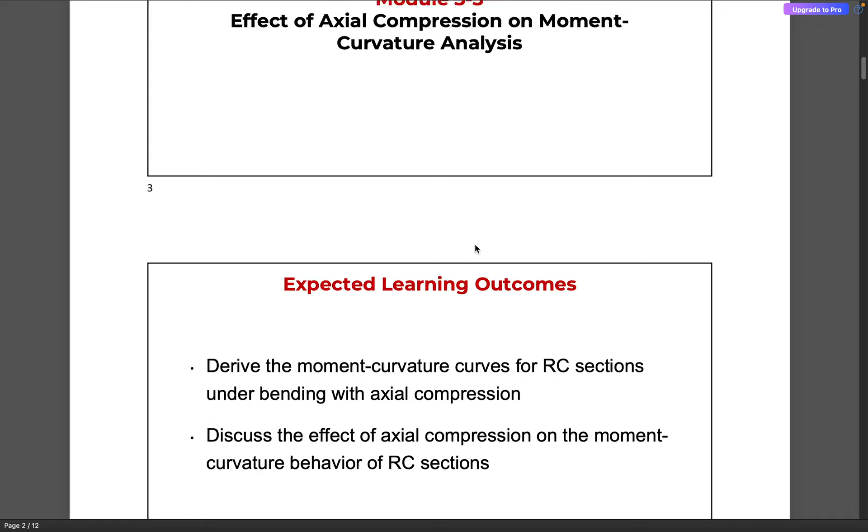As we discussed in the previous week, this moment curvature analysis is nothing but the development of the relation between the moment of resistance developed by the beam and the curvature it undergoes. So these are broadly the expected learning outcomes: to develop the moment curvature curves for reinforced concrete sections under bending along with axial compression. So there can be effect of axial compression acting on beams. We are going to delve into that topic this week, and discuss the effect of axial compression on the moment curvature behavior.

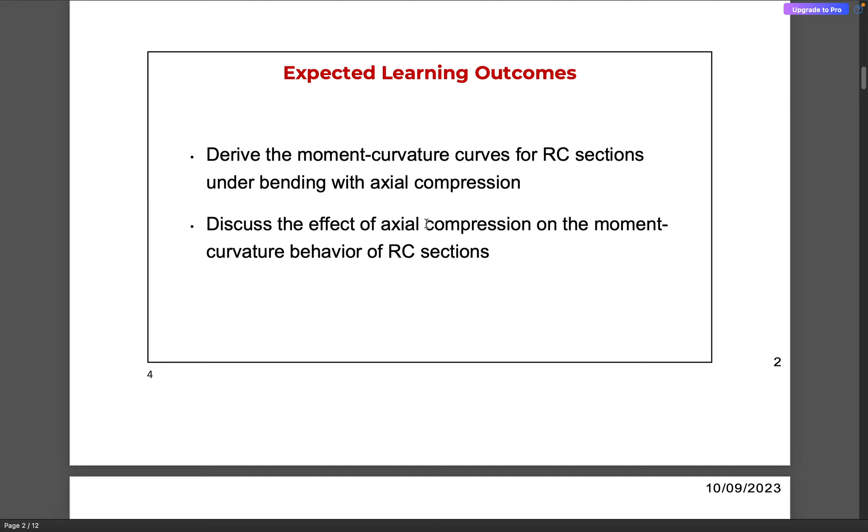So whenever there is an axial compression loading acting on the beam, what would be its influence on the moment of resistance, and what would be its effect on the curvature? So we're going to discuss about those issues in the form of numericals.

So essentially we are going to define this axial compression, that is P, through this relation, that is x into f prime c into Ag. Ag corresponds to the gross cross-sectional area of the beam, and f prime c is the compressive strength of the concrete cylinder. And when it is less than 0.2, we consider it as a beam action. However, when this x value, this load factor, is greater than 0.2, we consider it as a beam column action. So we're going to be discussing about both these actions in today's numerical examples.

So in the previous class we had referred to this simply supported beam. What happens when there is a representative uniformly distributed load, let's say W per unit length, and there is a representative point load W? What happens to the bending moment diagram? And then we analyzed what would be the compressive force and tensile force developed, and based on the couple these two forces form, and depending on the length of the lever arm between these two forces, we determine the moment of resistance.

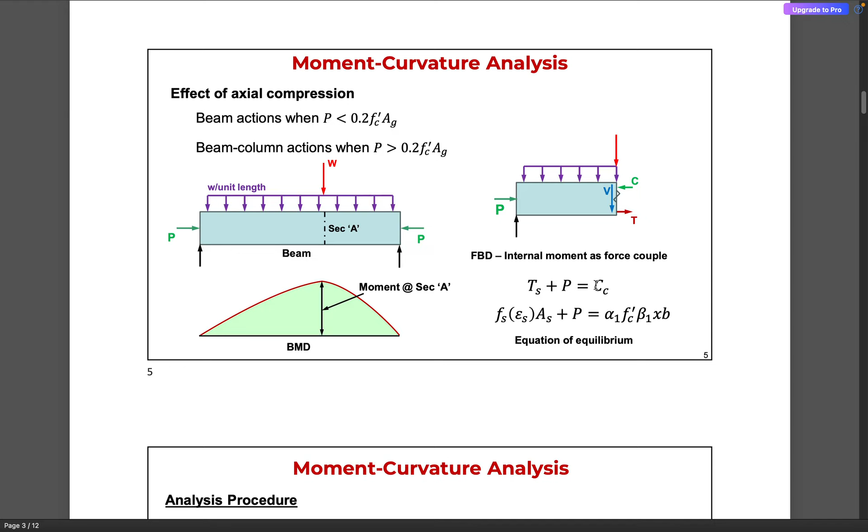So in order to develop the relation between moment and curvature, the analysis procedure is somewhat similar to what we did in the previous week. We need to choose a particular strain value within concrete in the extreme compression fiber, that is epsilon c. Then we need to assume a value of x, which represents the depth of neutral axis.

Then we need to calculate the value of compressive force and tensile force developed on the beam's cross section, and evaluate in terms of force equilibrium. We need to satisfy this condition: compressive force in the concrete should be equal to tensile force within the reinforcing bar plus the axial compression. If it is met, then we proceed to determine the value of m and phi. Otherwise, we increase or decrease the depth of neutral axis. This is essentially an iterative process.

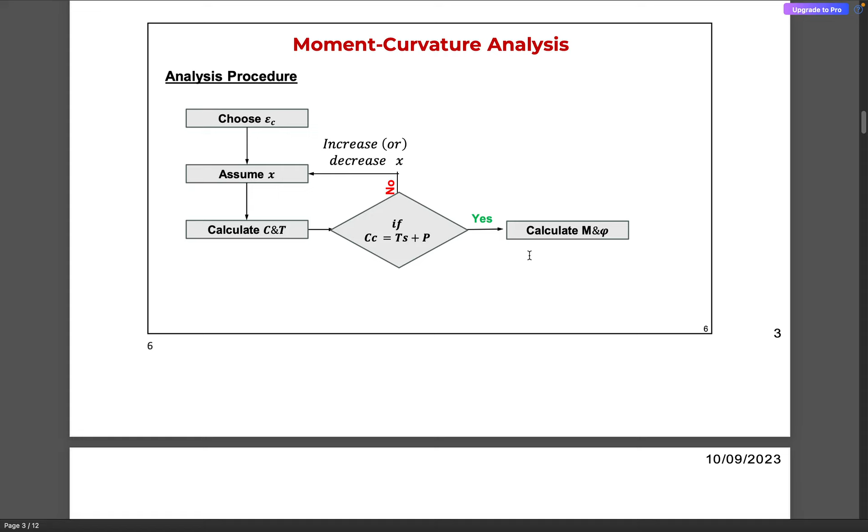In the previous class, we saw how we can use an Excel sheet to balance these forces and ultimately determine the value of m and phi. We are going to delve into this procedure in the form of numericals very shortly, and then we solved some example problems corresponding to 0.1 f prime c into ag, which can be defined as 10% of the actual compressive force, considering the compressive capacity of only the strength of concrete.

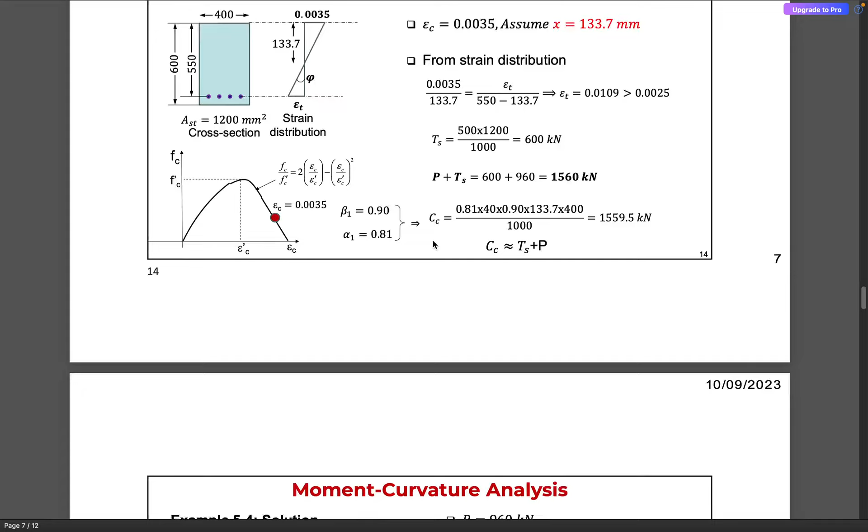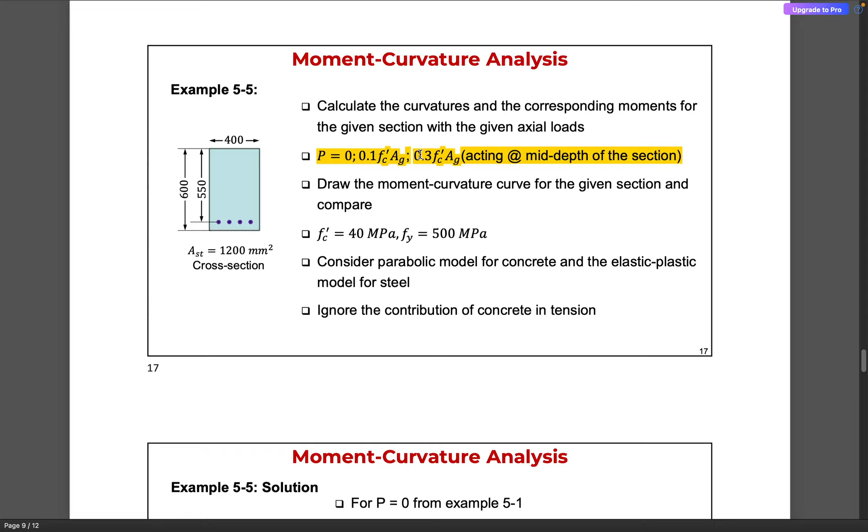So then we proceeded to determine the moment and curvature values corresponding to different values of strain. I'm going to skip this because we'll deal with it in detail in our numericals today. After finding the moment curvature relation corresponding to 10% of the actual capacity, we proceeded to determine the moment curvature relation for 30% of the actual capacity of the beam. Then we essentially compared the influence of axial compression on the moment curvature behavior. We're going to discuss more about them in the form of numericals.

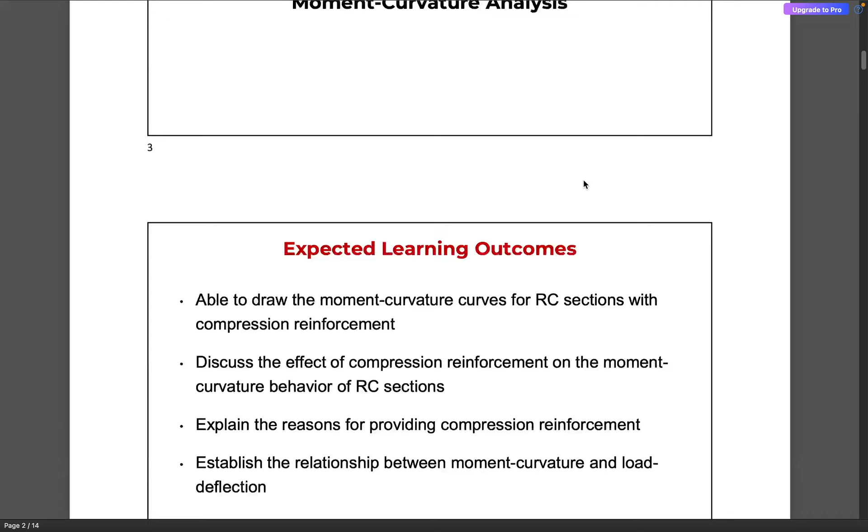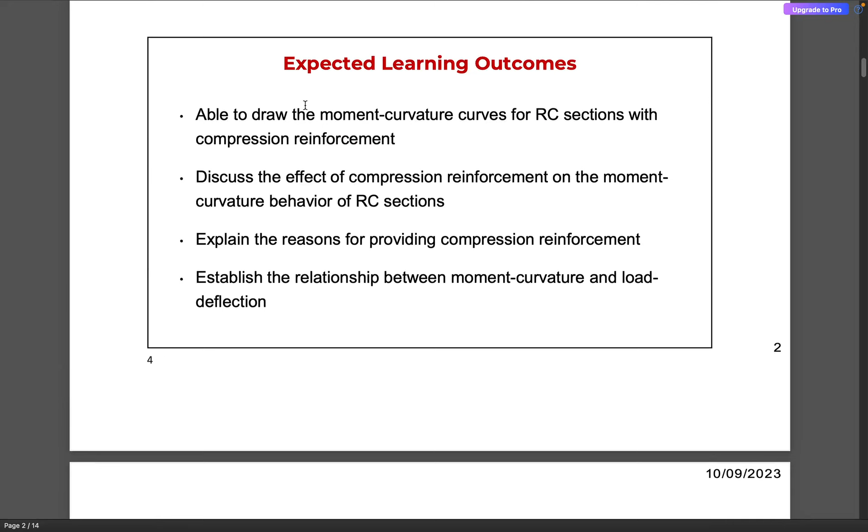Then in the second part of this week's lecture, we dealt with the topic of effect of compressive reinforcement on the behavior of flexural members. What would be the effect of compressive reinforcement on the moment curvature analysis? We dealt with this topic, and discussed some of the reasons for providing compression reinforcement. Broadly, I'd like to summarize briefly.

Essentially, the capacity is lesser for a singly reinforced section. When we add reinforcement on the compression side, it enhances the moment capacity of the flexural members. Then the load which is initially resisted by concrete in a singly reinforced section gets distributed between the concrete and steel in case of a doubly reinforced section.

We can also reduce the effect of creep on concrete in the compression zone, and reduce the stresses within concrete. Experimentally we find that when a beam is subjected to sustained loading, the deflections for doubly reinforced sections are substantially lower compared to singly reinforced sections.

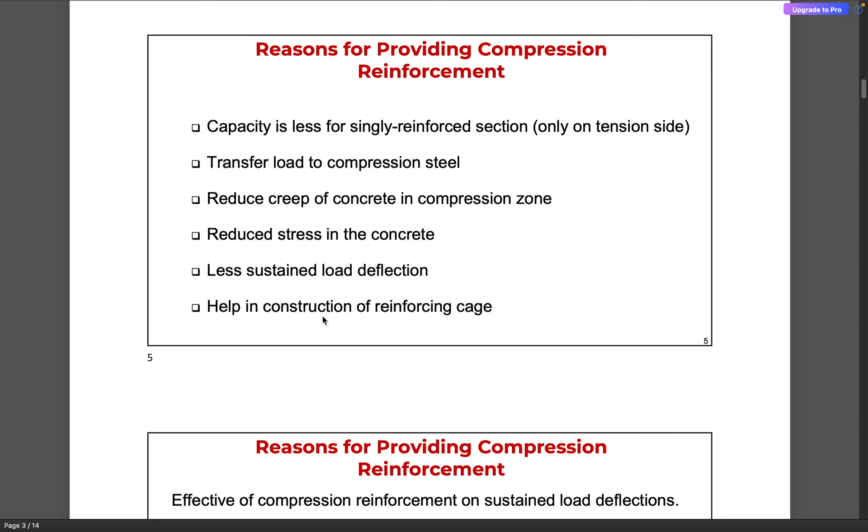And whenever we are developing a reinforcing cage, these compressive bars act as hanger bars, helping keep the lateral ties or transverse reinforcement in place. So these are some of the reasons for providing compression reinforcement. It also helps in reducing the depth of neutral axis, which in turn enhances the curvature of the beam cross section, which in turn increases the ductility of the beam.

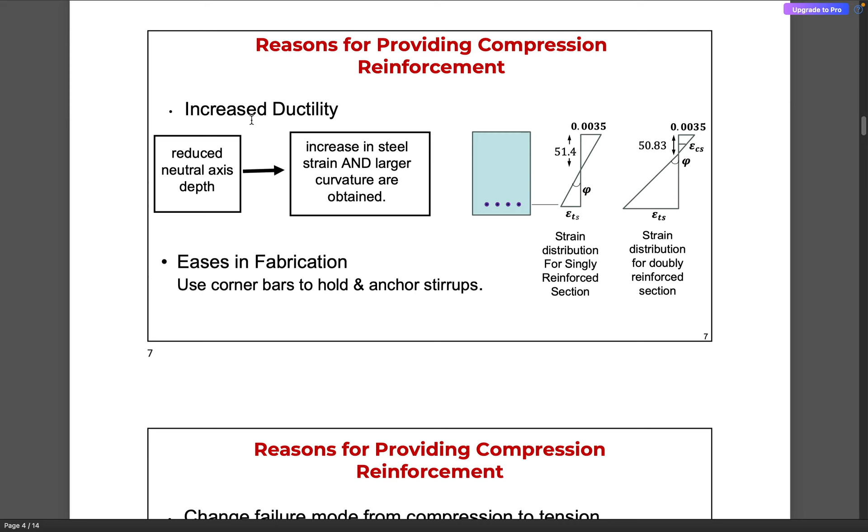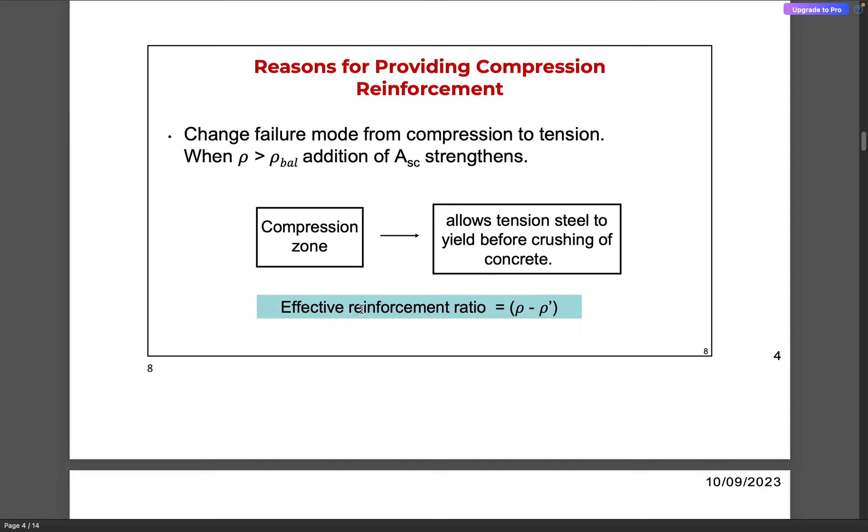Okay, and it helps in the fabrication. Compression bars, the reinforcing steel in the compression region, can be used as corner bars in order to hold and anchor the stirrups. Then we looked into the concept of effective reinforcement ratio and how it helps us in determining the moment curvature relation for a doubly reinforced beam.

And this is the slide where we expressed how we balance the forces that are developed on a doubly reinforced beam. So if we consider the same loading condition, with a distributed loading on the beam along with a representative point load, we have the bending moment diagram, and we need to consider these forces in order to attain equilibrium.

So we consider the axial force, then we have the resultant compressive force that is developed in concrete, then we have the compressive force developed in the reinforcing steel, then we have the tensile force that is developed in the reinforcing steel.

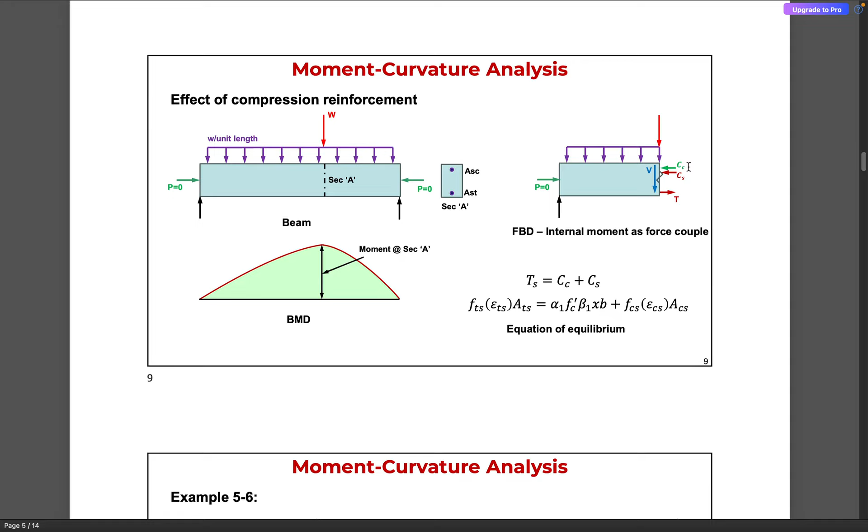So if we equate this axial force equal to zero, then we need to balance only these three forces. The compressive forces within concrete and steel are acting in the left direction, and we have the tensile force within the reinforcing steel acting in the right direction. So in order to attain equilibrium, we need to balance the compressive forces with the tensile forces, that is Cc plus Cs is equal to T. We are going to discuss more about these when we take up the numerical problems.

So we essentially looked at certain numericals, and the procedure here also remains the same as we saw in the flow chart in the previous part of the module. We essentially take a value of epsilon c, that is the strain within concrete, then we assume depth of the neutral axis.

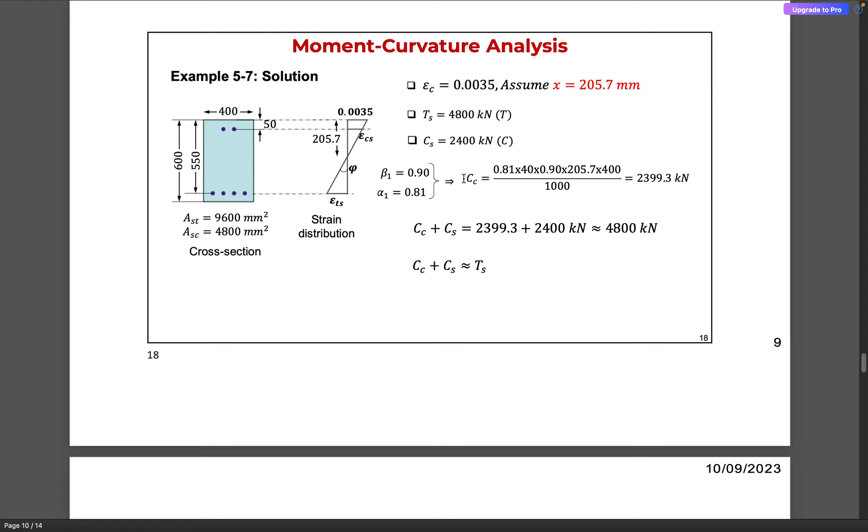Then we determine the value of tensile force in the tension steel, then we determine the compressive force in the compression steel, then we determine the resultant compressive force developed within the concrete in the compressive region. Then we try to balance it out, and then we determine the moment of resistance by multiplying the forces with the corresponding lever arm.

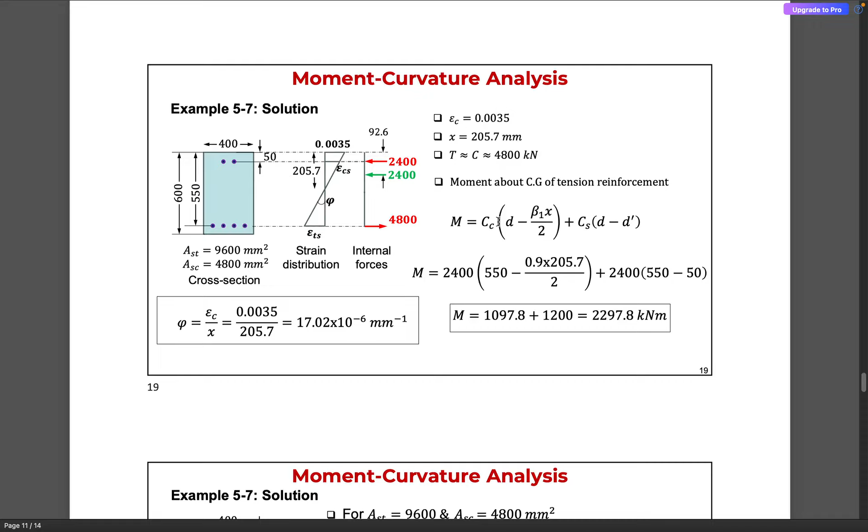By integrating this particular relation for the curvature, we have 1 by r, that is equal to the curvature, which is equal to M by EI. So essentially by the process of integrating this particular equation two times and applying the boundary condition, we can obtain the relationship between the curvature within a beam and the corresponding deflection.

So there are some problems in the assignment, so I encourage you all to try that, and if you are not able to obtain the solution, we are always there to resolve the issues.

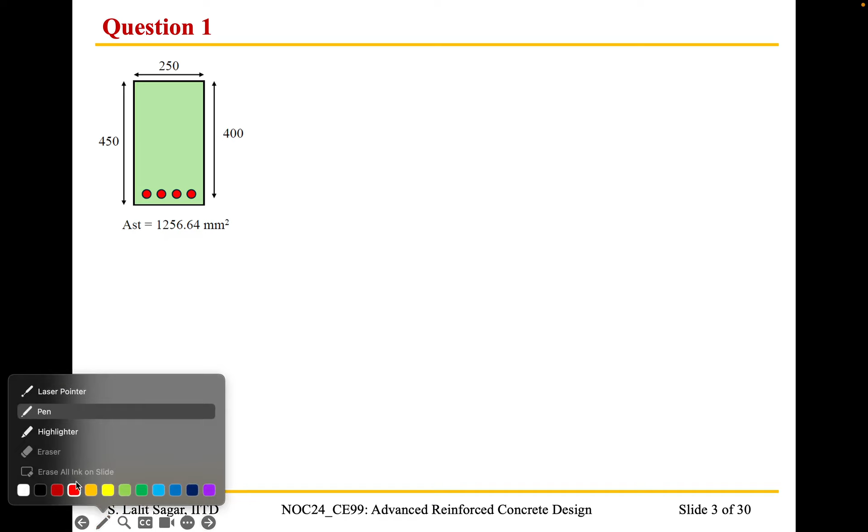Right? Okay, so let me draw the strain profile for this particular beam. What we need to find out is the moment of resistance, or the exact term is the ultimate moment capacity, right?

So this would be the strain distribution along the depth of the cross section. We have epsilon c here, and this would be the depth of neutral axis, which we need to assume, right?

So yes, to determine the ultimate moment capacity, we need to assume the value of epsilon c as 0.0035. So now we need to assume a value of x. The x value is basically an iterative process, as I was mentioning in the previous class also. So let us take the help of the Excel sheet in order to determine what should be the x value.

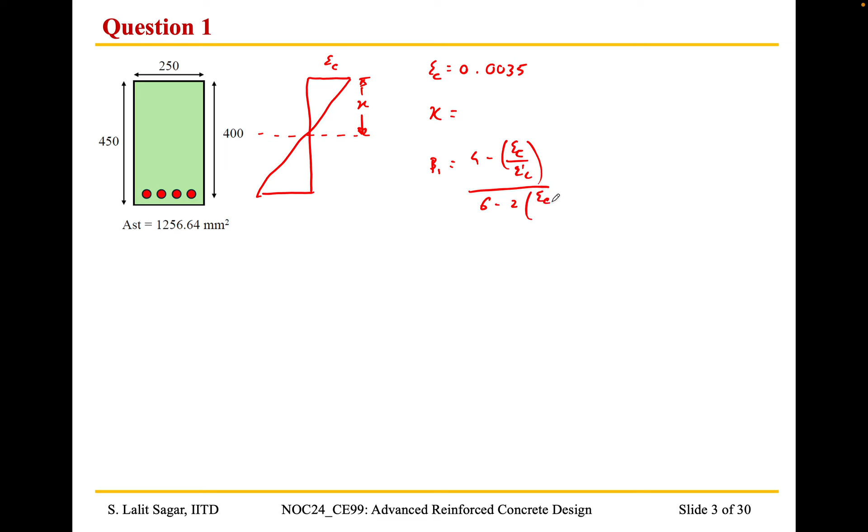So we have the value of beta 1 is equal to 4 minus epsilon c by epsilon prime c, divided by 6 minus 2 times epsilon c by epsilon prime c.

So if you plug the value of epsilon c as 0.0035 and then we plug the value of epsilon prime c, that is the strain corresponding to the peak stress, as 0.002, then we obtain a value of beta 1 is equal to 0.90. Okay, we are going to check these values in the Excel program also.

Then we have to determine the value of alpha 1. Alpha 1 is given by 1 over beta 1, into epsilon c by epsilon prime c minus 1 by 3 into epsilon c by epsilon prime c whole square.

And when we again plug the value of epsilon c as 0.0035 and epsilon prime c as 0.002 and beta 1 as 0.90, we have the value of alpha 1 is equal to 0.8102. Okay, now in order to obtain the value of M and phi, we need to balance the compressive force with the tensile force. So let me do that next.

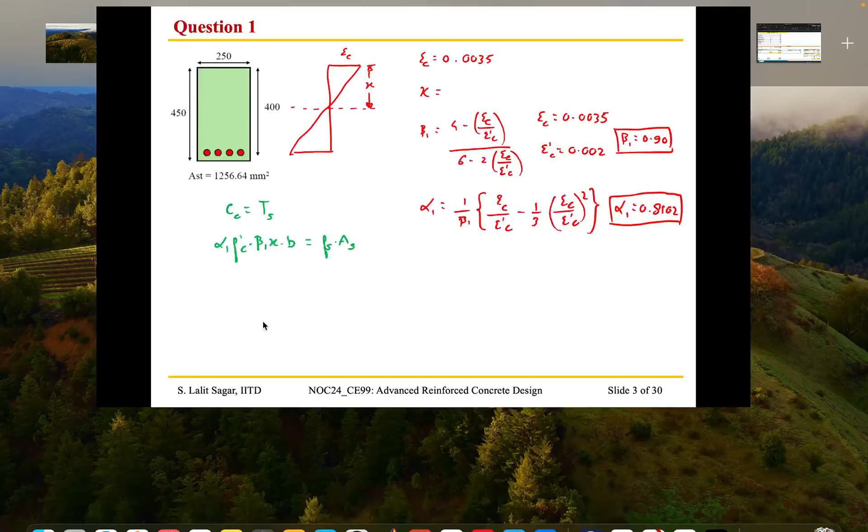Okay, so I think, yeah, we can go here, and I hope my screen is visible and the numbers are visible. Okay, so we have the width of the beam as 250 mm, overall depth is 450, and the effective depth turns out to be 400, and AST I have calculated and put the value here. Here's the percentage of steel. F prime C is 30 MPa.

Okay, moving on. So essentially, let me put this value as 0 because we are not considering the effect of axial compression for this particular problem. Okay, so this is the value of epsilon C. So we need to balance out the value of the compressive force along with the tensile force.

Okay, so for a depth of neutral axis of 338, we are getting a value of Cc as 1800 and Ts as 161. So the value of Cc is way higher. We need to reduce the value of x. Let's try 300. Still the Cc is very high. Let us reduce it to 250.

Okay, still the Cc is significantly high. Let's try 200. Still high. Let us try 180. Okay, but we are still high, but we are getting closer.

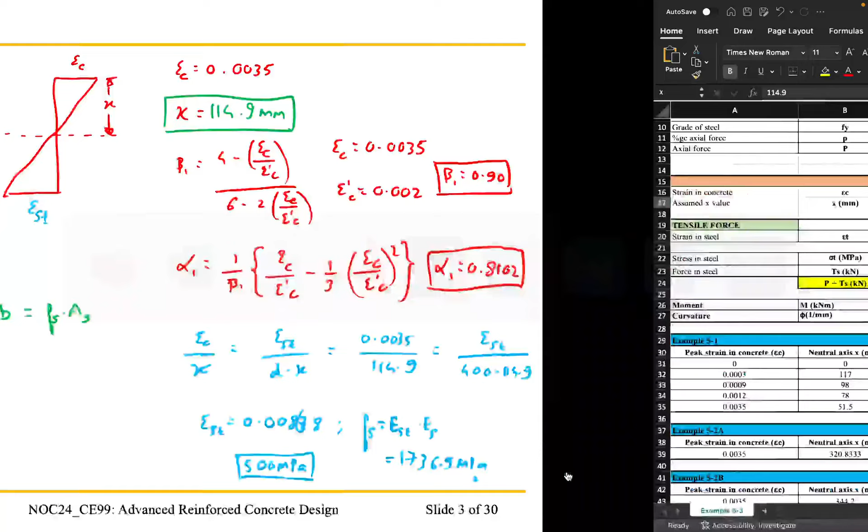So correspondingly Fs would be epsilon st into Es. So when we multiply this strain with 2 into 10 to the power 5, we get a value of 1736, which is higher than the yield value. So we consider the limiting value, which is 500 MPa. I think even in that Excel sheet it is trying to point out that the yield value of strain is 0.0025. So this particular strain is much higher, almost 4 times this value.

So it has yielded, so we need to consider a value of sigma t, or the FST, as 500 MPa. Let us go ahead with the calculations. So we have tensile force TS is equal to 500 into area of steel would be 1256.64. So what would this value be? 628. Yes, so it is, as we saw, it was 628.3, I guess.

Yes, and then we have the value of CC. CC is alpha 1 into F prime C. Let me just straight away substitute the values so that we can save on time. CC is equal to alpha 1 is 0.8102 into F prime C is 30 into beta 1. Beta 1 is 0.9 into X is 114.9 into 250, which gives us a value of 628.3. The participants can just verify with this value.

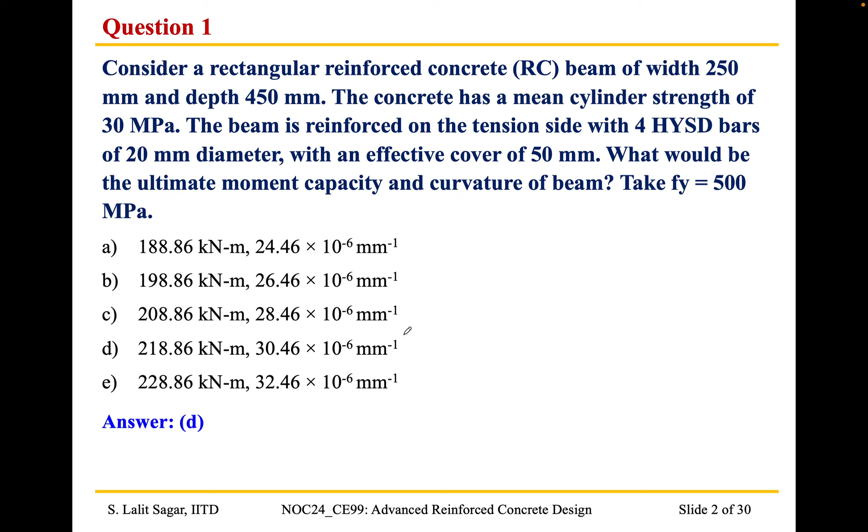So this was the starting point where we solved a numerical based on the moment curvature relation of the ultimate moment capacity of a singly reinforced cross section, right? So moving forward, we are going to evaluate what would be the effect of compressive force on the moment curvature relation. So before going to that, there is a question again on the singly reinforced cross section.

I would like to just request you to solve the problem and let me know the answer. So we are considering the same dimensions for the beam. However, for the reinforcement, if we replace it by 4 bars of 20 mm diameter with 5 bars of 25 mm diameter, which type of failure is expected under the bending test? For this problem, we don't need Excel program, it's not an iterative process. I request you all to take 3 to 4 minutes and come up with the answer. So before we can start the solution, can anybody tell how you would approach this particular problem?

Reinforcement is increased, it is tension control failure. I'm sorry, can you repeat please? Reinforcement is increased and it is tension control failure. Okay, but this is a numerical example, so it can be compression controlled also, because when you increase the steel it can go... in the previous example it was an under-reinforced section, because the percentage of reinforcement was 1.1%, so we have not evaluated whether it is under-reinforced or not, but based on my calculation it was an under-reinforced section. But when we increase the amount of steel, it can be a balanced section or an over-reinforced section also. So when it's a balanced or over-reinforced section, it can be a compression control failure also.

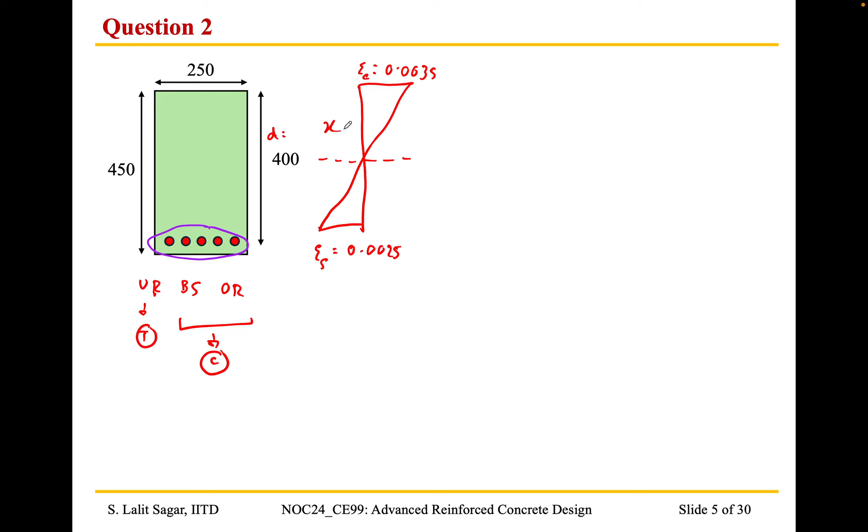That is epsilon C by x is equal to epsilon S divided by D minus x, by similar triangles. By solving this expression, substituting epsilon C as 0.0035, epsilon S as 0.0025, and D as 400, I got a value of x equal to 233.3 millimeter.

Then corresponding to this, we find out the value of CC and the value of TS. We need to balance these two forces. Let me take another sheet. So we have CC is equal to alpha 1 into F prime C into beta 1 into x into B, which is equal to Fs into AST. So we have all the values. We need to find out the value of alpha 1.

So alpha 1 is a function of epsilon C and epsilon prime C. Based on my calculations, I got a value of 0.8102. It's also a function of beta 1, which is a function of epsilon C and epsilon prime C, and I got a value of 0.9. The participants can kindly confirm this later by substituting the values into the equations for alpha 1 and beta 1. So let me substitute these values.

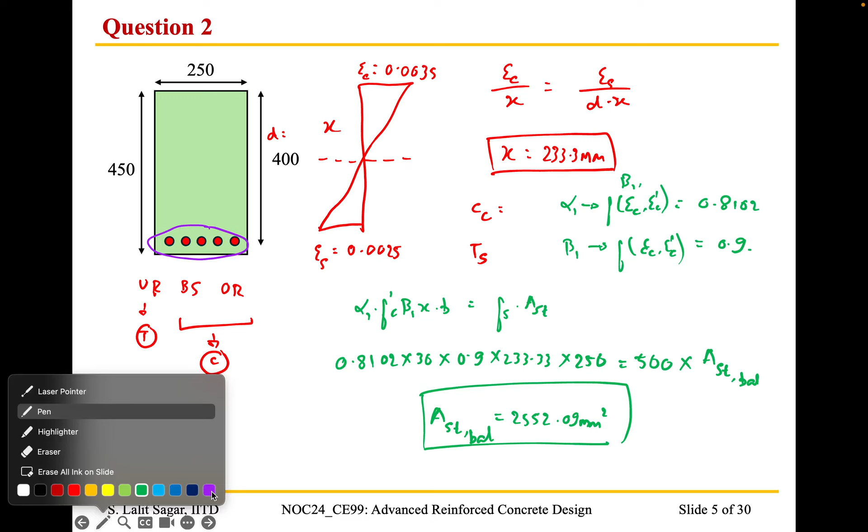So what we can deduce from this value of AST is that any value less than this one is an under-reinforced section, and any value greater than this becomes an over-reinforced section. So when we find out the AST corresponding to 5 bars of 25 mm diameter, what is the value of AST? Can anybody tell?

2455. So the value of AST would be 2455 mm square. Since this particular value is less than AST balanced, we can conclude that it is an underreinforced section. Hence it is tension controlled.

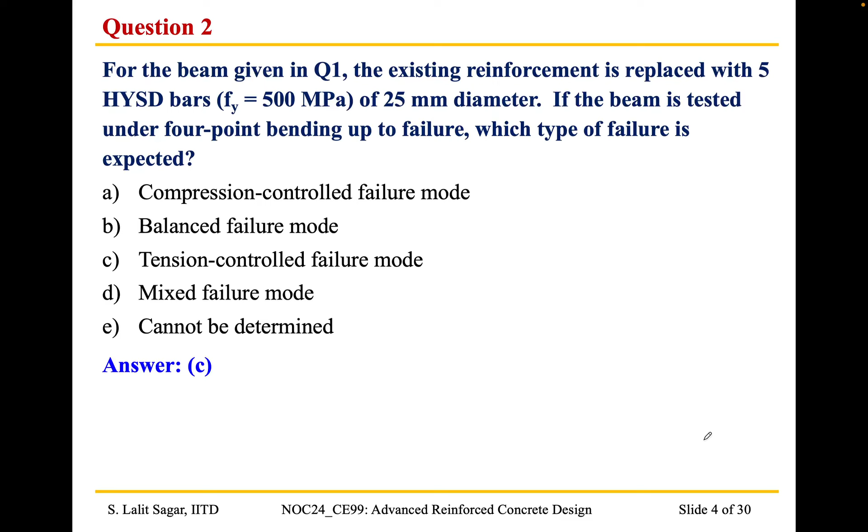Since it is underreinforced, it is a tension controlled failure mode. Underreinforced is tension controlled. On the other hand, if it is a balanced section or an overreinforced section, it becomes compression control. If there are no questions, we can proceed with the next question.

So question number 3 is, when a beam under flexure is subjected to axial compression, which of these equations represent the force balance equation?

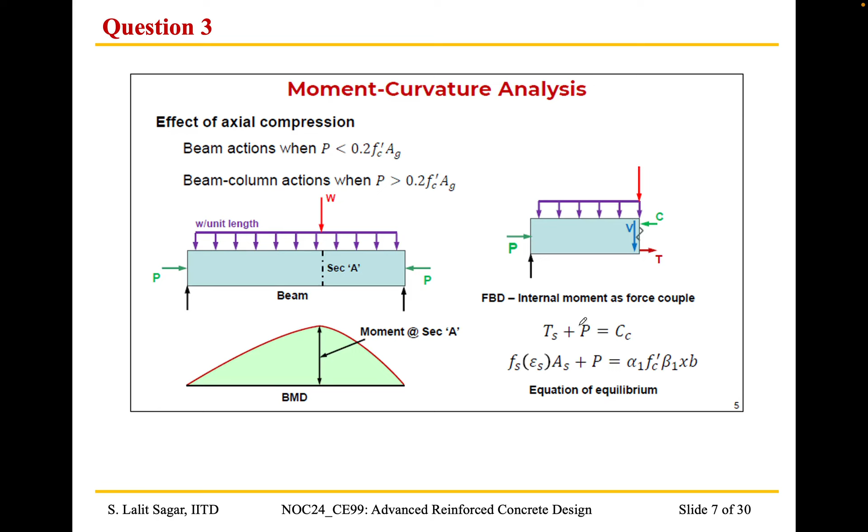As the participant mentioned, it is a simple force balance question, so the correct answer is option A. When dealing with the additional compressive force acting on the beam, we need to balance these forces. The resultant compressive force acting on concrete acts in the left direction. On the other hand, the axial compression and the tensile force developed in the reinforcing steel act along the right direction. So when we balance these two, we get Ts plus P is equal to Cc. So option A is the correct answer.

So we have the numerical here. We are going to see the effect of compressive force on the moment curvature behavior of a beam. I'll read out the data of this particular problem.

So we have a beam similar to question 1. It has a width of 250 mm and overall depth of 450 mm, and the cylinder has a mean compressive strength of 30 MPa. The beam is reinforced with 4 bars of 20 mm diameter, and the yield stress is 500 MPa. The reinforcement is provided on the tension side with an effective cover of 50 mm.

The major difference is that the beam is subjected to an axial compressive force of 10% of the axial capacity, considering only the contribution of concrete. So this is the axial compressive force, 0.1 F prime C into Ag. We need to determine the moment of resistance and the curvature corresponding to a concrete strain of 0.0005.

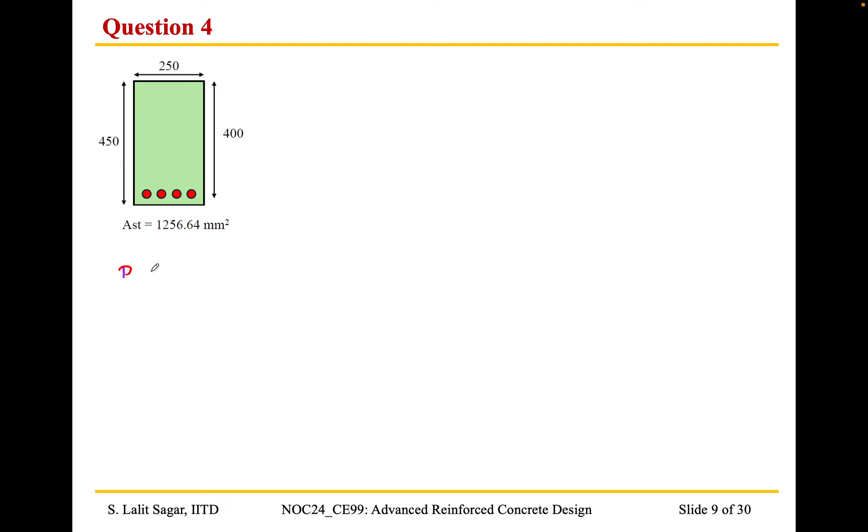Let us consider the cross section. It is being subjected to an axial force of P. So the value of P would be 0.1 F prime C into AG. So 0.1 into 30...

Into AG, that would be 250 by 450. So what would be the value of P? Can anybody answer? 337.5. Yes, so the value is 337.5 kilonewton. So this is the force that is acting, the axial compressive force.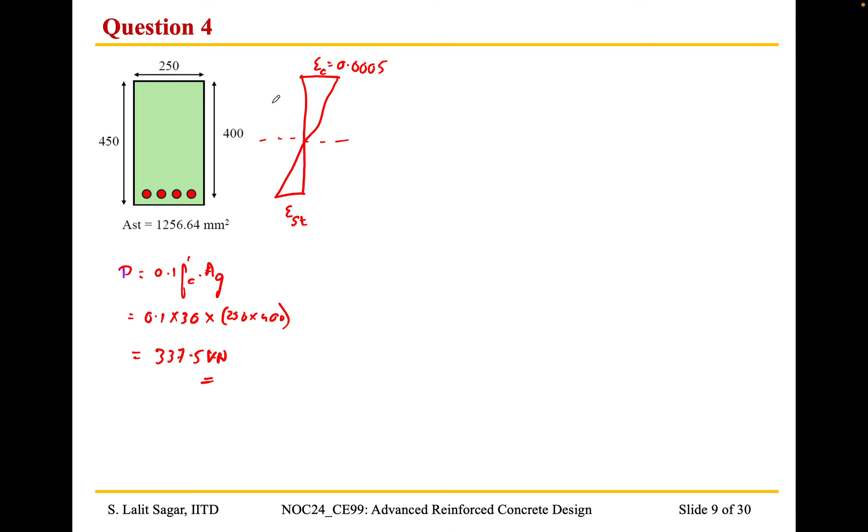Let us draw the stress distribution along the depth of the cross section. So we have epsilon C. We need to find out the value corresponding to 0.0005. Then we have epsilon ST. So this would be the depth of the neutral axis.

Let us check what would be the x for which we get the force balance between the compressive and the tensile force and the actual compression. The value of B is same, D is same, and for this let us plug a value of 0.1, for which we got 337.5 kilonewton. The value of epsilon C is 0.0005. We have compressive force as 197, tensile force as 311, and P is 337.5. The summation of actual compressive force and the tensile force is 649, which is very high compared to the compressive force.

We need to increase the value of x. So let us progressively increase the value of x. For 120, I will not waste any time because the participants have got the answer. So I got the force equilibrium for a value of 243.4.

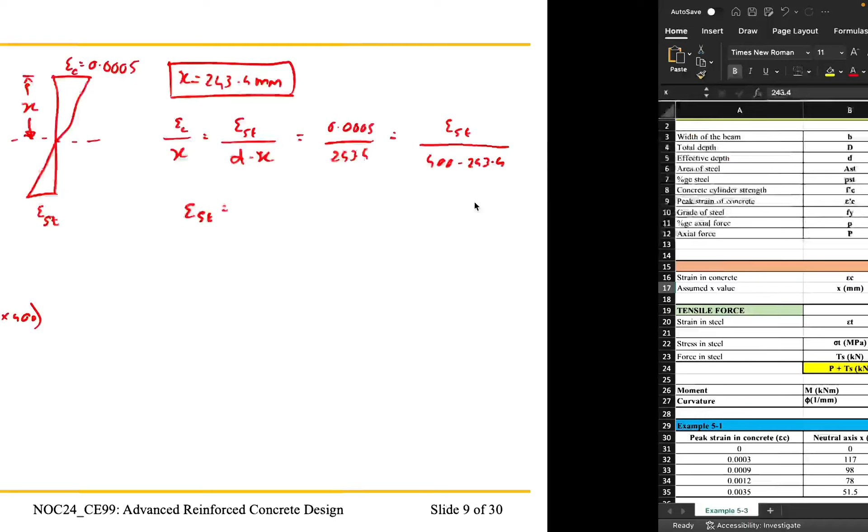Epsilon st, what would be the value of epsilon st? Can anybody confirm? 0.00032. Okay, so let us look. Yeah, as we can see in the Excel program, it is 0.000...

0.00032, and correspondingly, what would be the value of FST? Multiply it by the value of Young's modulus. 64.33, yeah, thank you for confirming. So it is 64.34. Let us round off the second decimal point, 64.34 MPa. Please note that this particular strain value is less than the yield strain.

So we have the tensile force Ts is equal to Fs multiplied by As, that is 64.34 multiplied by 1256.64, and what would be this value Ts? 418.3. Just the value of Ts, please. So Ts would be, yeah, 80.85.

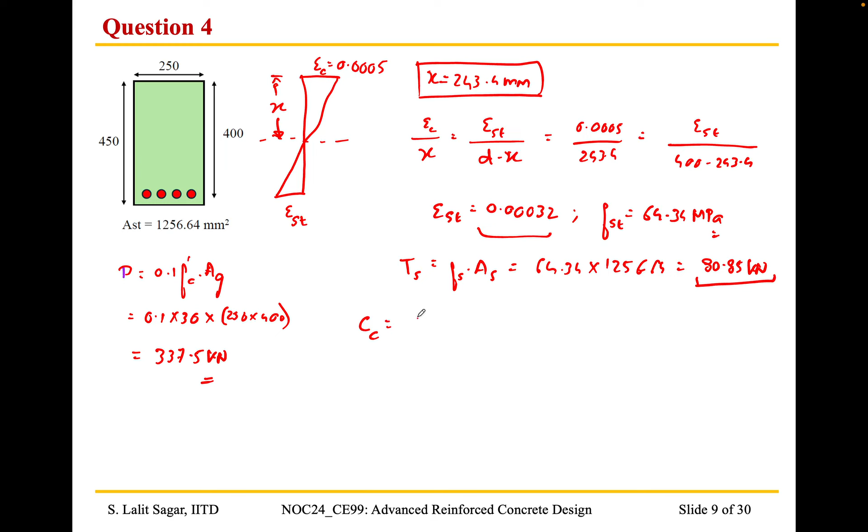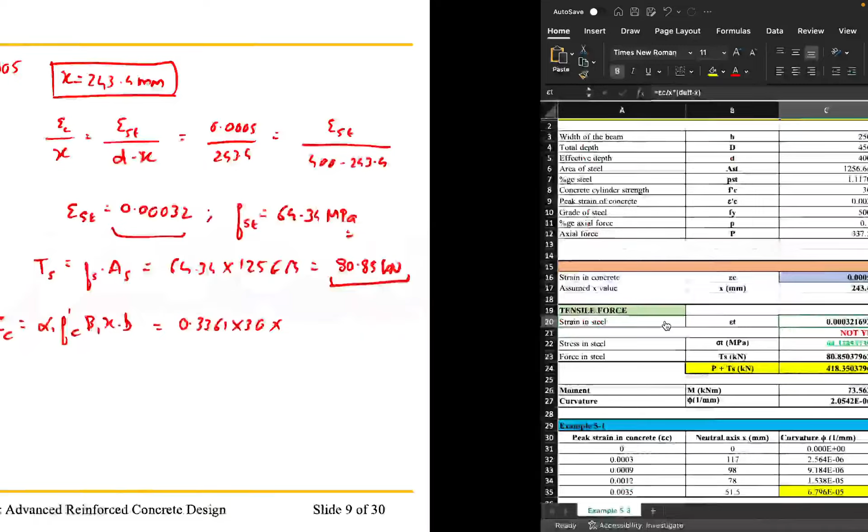And let us find out the value of Cc. Cc is equal to alpha 1, f prime c, beta 1 into x into b. So alpha 1 and beta 1, for values of 0.0005, I got alpha 1 as 0.3361, and beta 1 would be 0.6818.

And the value of x as we obtained is 243.4, multiplied by 250. We obtain the value of Cc as 418.34 kilonewton. So we need to balance the forces now.

That is, let me change the ink. In order to satisfy equilibrium, Cc is equal to P plus Ts. So we see that 418.3 is equal to 337.5 plus 80.85.

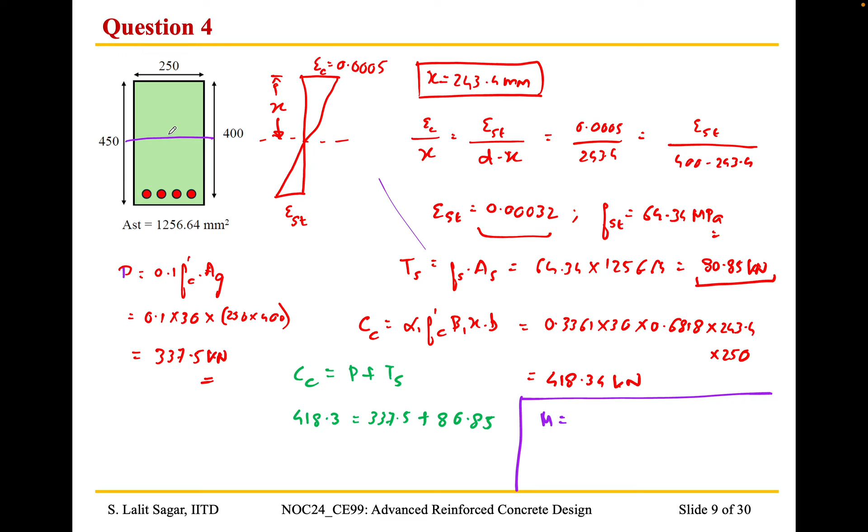So now for the final step, moment of resistance corresponding to a concrete strain of 0.0005 in the extreme compression fiber. M is equal to, we are considering the moment about the centroidal axis, about which this force P is acting. So if this is the cross section, we can consider that this is the point through which the force P is acting.

So M is given by Ts into d minus capital D by 2, plus Cc into capital D, the overall depth, minus beta 1 into x divided by 2. So when we plug the values, we have the value of Ts, the effective depth, the overall depth, the compressive force 418, beta 1 into neutral axis depth, we have all the values.

When we plug all these values, we get a value of 73.56 kilonewton meter.

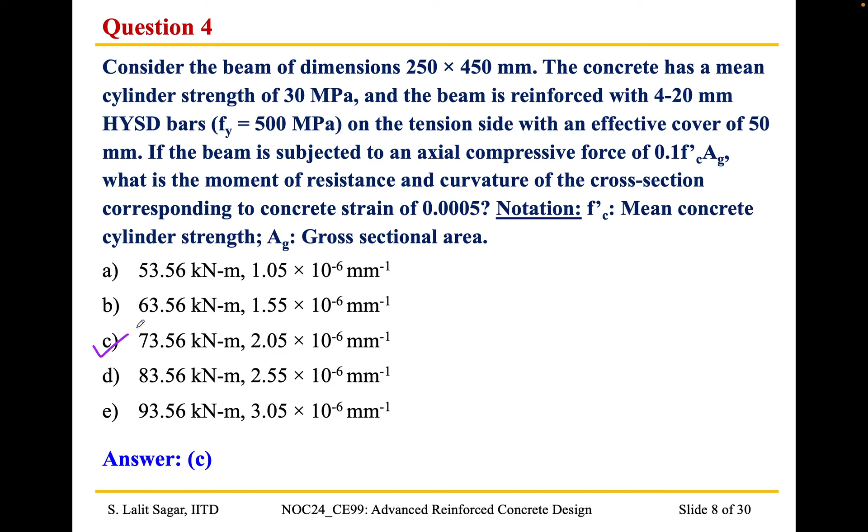So this is for the benefit of the participants who are not able to solve it, they can check this after watching the recording of this video. So we ultimately obtain these values of M and phi corresponding to epsilon c of 0.0005. Now we move on.

So for the beam given in question 4, what would be the corresponding moment of resistance and curvature for a strain of 0.001? We have essentially doubled the value of strain in concrete from the previous example. So kindly take one or two minutes and tell me the value of M and phi.

Option B. B for Bangalore, yeah, thanks for the response. Anybody else would like to confirm?

We were able to balance these two forces, CC and P plus TS, and the corresponding value of moment is 142 kilonewton meter and 5.16 into 10 to the minus 6 per millimeter. 142 and 5.16. Option B is the correct answer.

Okay, thanks for the response. We can proceed to the next question. Now, what would be the value of M and phi corresponding to concrete strain of 0.0015?

Answer is D, sir. Okay, thank you for the response. Anybody else would like to confirm? Okay, so I think we can go ahead with the answer, and the correct answer is option D, absolutely right.

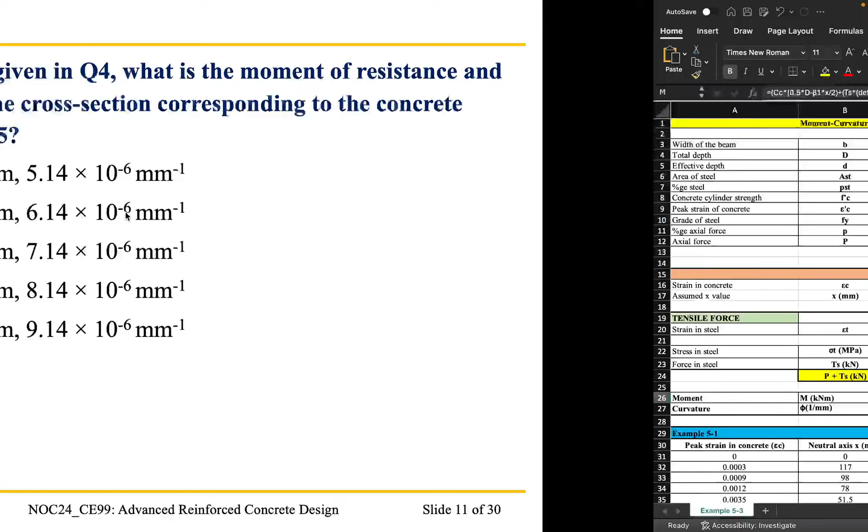So we can go to the Excel sheet and just verify that. Let us plug in a value of 0.0015, and for this I got a value of 184.4.

I was able to balance the forces, 778 and 778, and the corresponding moment M is 200.37 and phi is 8.14. So option D is the right answer. Thanks for the answer.

Moving forward, what would be the M and phi for 0.002? Kindly take 1 minute.

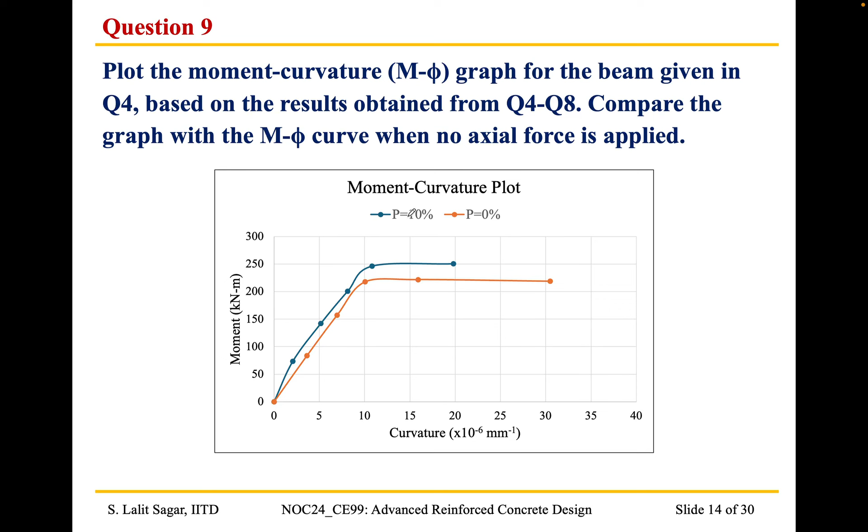Yes, anybody got the answer? If you are able to factor in the three forces properly in the Excel sheet, the answer is B. Okay, thank you for the response.

We will wait for another 30 seconds if other participants would like to contribute. Okay, I think we can look at the answer now. Yes, answer B is absolutely right.

I initially had thought of solving the problem step by step, but since we have a few more questions lined up for this session, we can straightly solve it in the Excel spreadsheet. So what we are doing is from 10% we are increasing it to 20%. Let's make it 0.2, and the corresponding actual compressive force is 675 kilonewton, and the value of epsilon c is 0.0035.

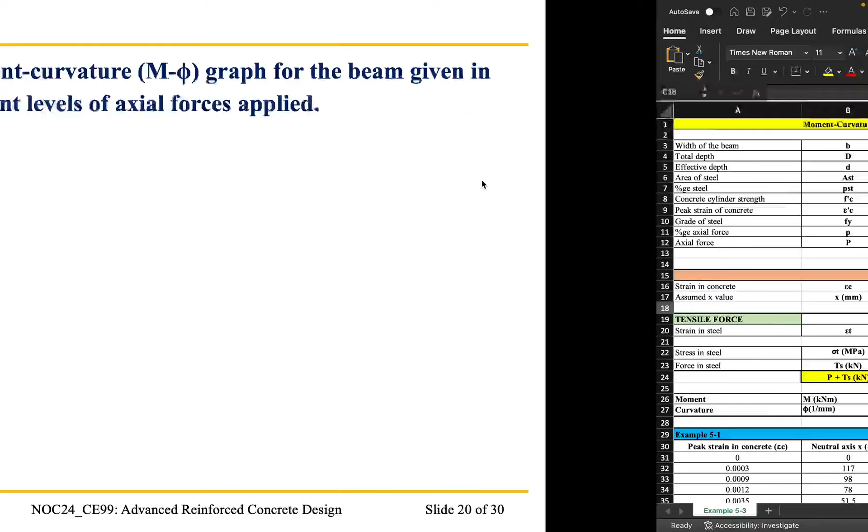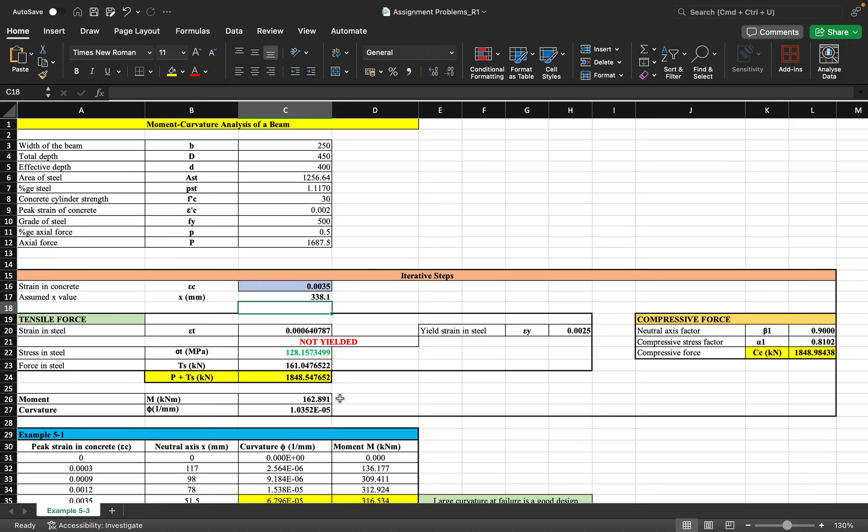Let us go to the Excel sheet and enter a value of 0.5. The actual compressive force is 1687.5, epsilon c is 0.0035, and for an x value of 338.1 millimeter, I was able to balance the three forces, 1848 kilonewton and 1848 kilonewton. The corresponding M and phi values are 162.89 kilonewton meter and 10.35 into 10 to the power minus 6 per millimeter. Option C is absolutely right.

So let us see what would be the moment curvature plots for the beam given in question 4, corresponding to different levels of axial forces. This is how it varies. Now let us dwell on this graph and understand what it is trying to tell us about the flexural behavior of beams corresponding to different levels of axial load.

This orange plot corresponds to the moment curvature plot where no axial force is acting, and then we have the blue plot which corresponds to 10% of the axial load. Then we have this light blue turquoise color corresponding to 30% of the axial load, and this purple corresponds to 40%, and green corresponds to 50%.

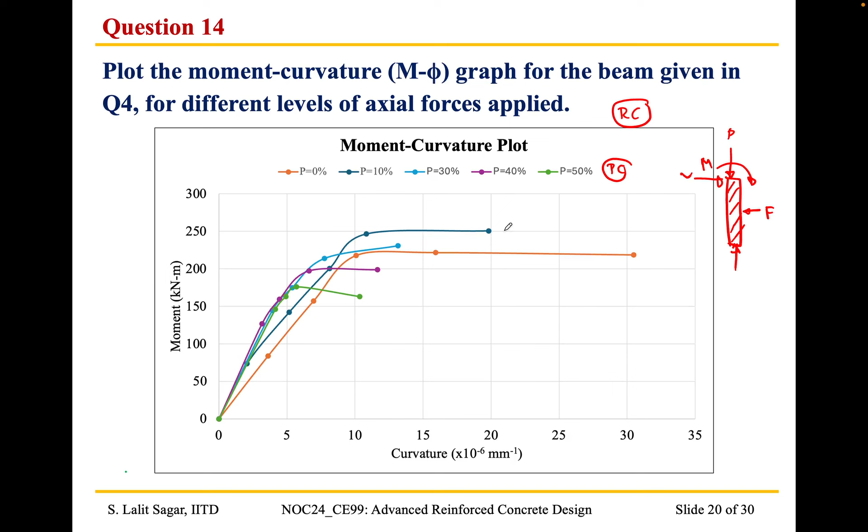Option C is absolutely right. As we discussed in the previous slide, up to a value of 20%, it enhances the moment capacity, but it is detrimental to curvature, decreasing the curvature capacity of the beam. So option C is the right answer. We can go to the next question.

So when we consider a doubly reinforced beam, what is the expression for effective reinforcement ratio? If rho is the reinforcement ratio on the tension side, and rho prime is the reinforcement ratio on the compression side, how do we express the effective reinforcement ratio?

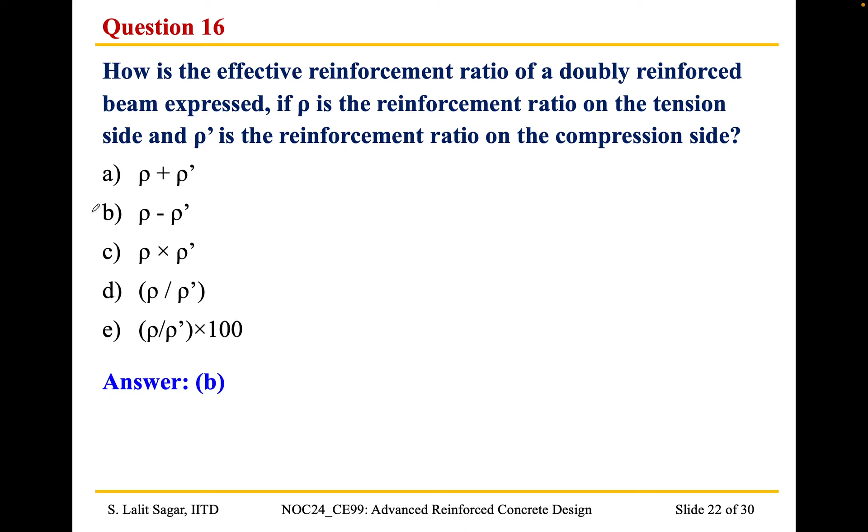Option B. Thanks for the response, it is quite straightforward, absolutely right. The effective reinforcement ratio is given by rho minus rho prime.

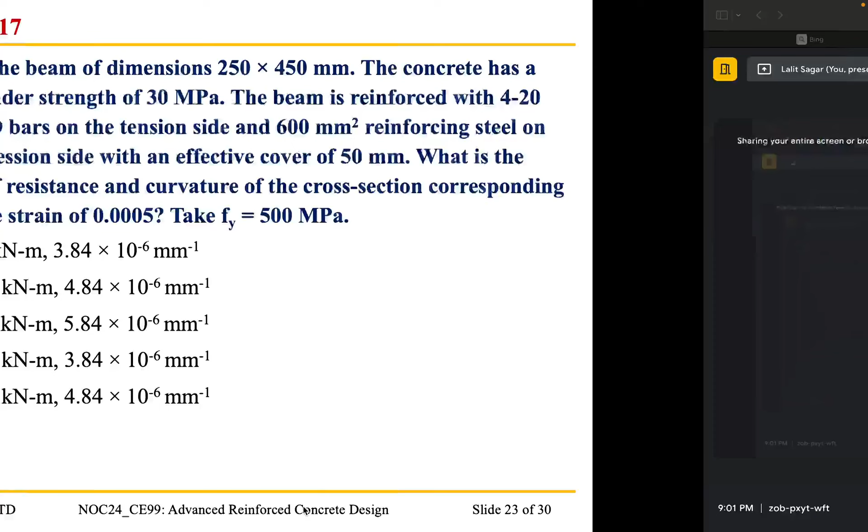Anybody able to obtain the answer? Thank you for the response. Since we are overshooting the time, I will go ahead and show the solution.

Option A is absolutely right. Let me solve this, since we are dealing with the doubly reinforced section for the first time in today's session. We are looking at the strain distribution along the depth of the cross section.

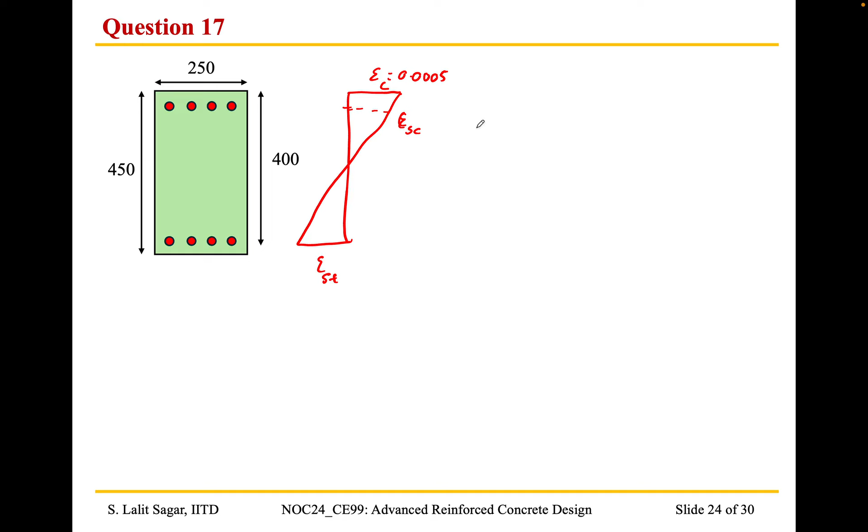We are interested in the strain values at 3 points: epsilon c corresponding to compression, epsilon sc, and epsilon st, and we need to find these for a value of 0.0005. Based on similar triangles, epsilon c by x is equal to epsilon st divided by d minus x.

We need to go back to the spreadsheet. I already have it ready: 250, 450, and let me change the value of AST to 1256.64 mm square, and ASC we have 600 mm square. D prime is 50 mm, and epsilon c, the rest of the data is fine, 0.0005. For a value of x equal to 130.1, let's see what happens.

We are able to balance approximately the value of TS on one hand and CC plus CS on the other hand, that is the force in the tension steel and the effective force in the compression block of concrete and the compression steel. It is approximately 260, and for this we have a value of 130.1 millimeter for x.

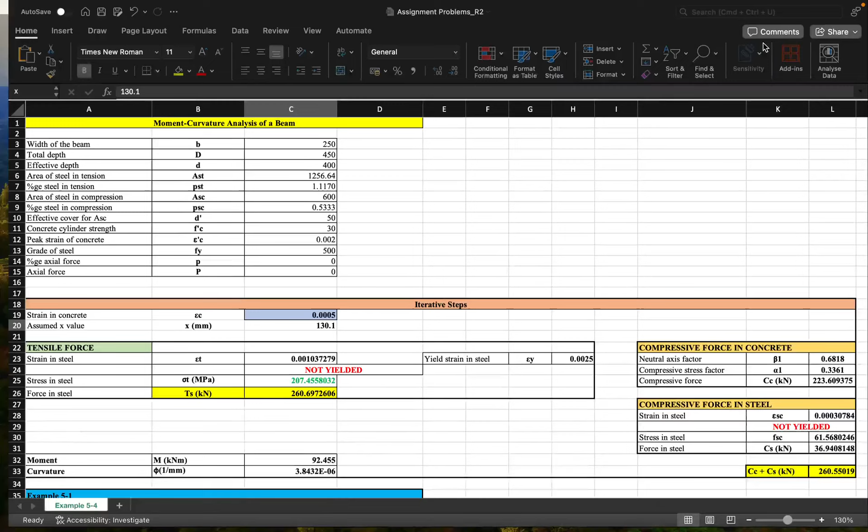We get the value of epsilon st equal to how much? I got 0.001037. So fst is equal to epsilon st into es. Let me jump straight into the value of TS, that is tensile force in the steel, given by 260.7.

Yeah, we have 260.7 kilonewton, right? So this is the value of Ts that we have.

Now let us look at the compressive forces using a different color. So we have Cc is equal to alpha 1 f prime c into beta 1 into x into b.

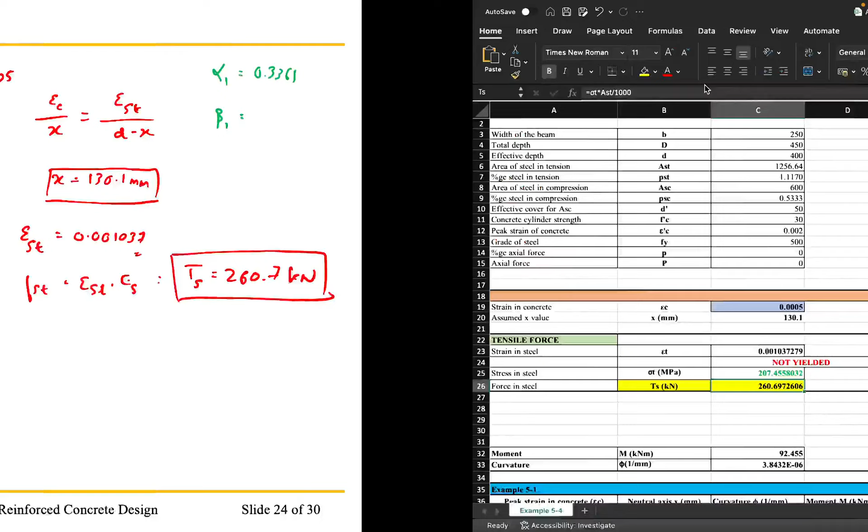So for a value of 0.0005 we have alpha 1 is 0.3361, and beta 1 is 0.6818. So when we plug the values, we get the value of Cc as 223.61 kilonewton.

Then we have the value of Cs. So before proceeding to Cs, we need to determine the value of epsilon Sc. So we have epsilon C by x is equal to epsilon Sc divided by x minus d prime, where d prime is the effective cover for the compression steel.

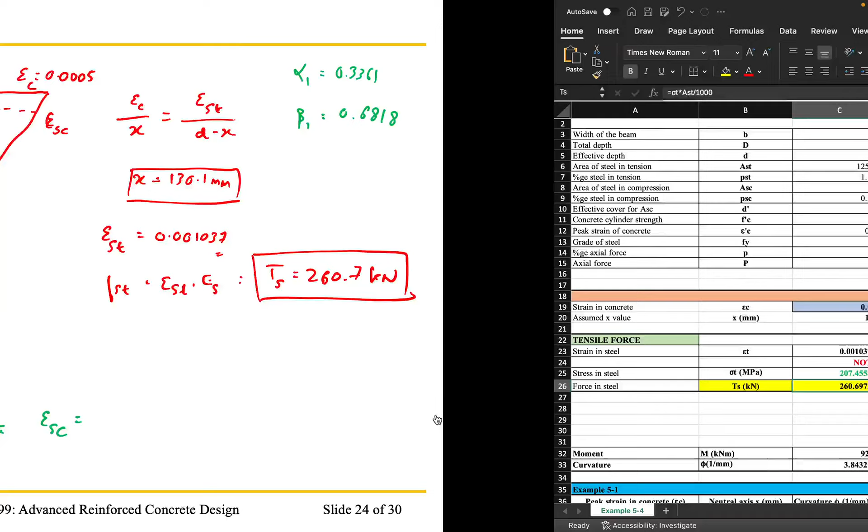So substituting, we have the value of epsilon Sc as 0.00031, and correspondingly we have

Cs is equal to epsilon Sc into Es into ASc. ASc is 600 mm square. By plugging the values, we get the value of Cs as 36.94 kilonewton.

So we are able to balance these three forces, and let me take a different ink here, and we need to balance Cc plus Cs is equal to Ts.

For this particular case, the moment of resistance we can take about the tensile force, that is Cs into d minus d prime plus Cc into d minus beta 1 into x divided by 2, for which we get a value of, what was the answer?

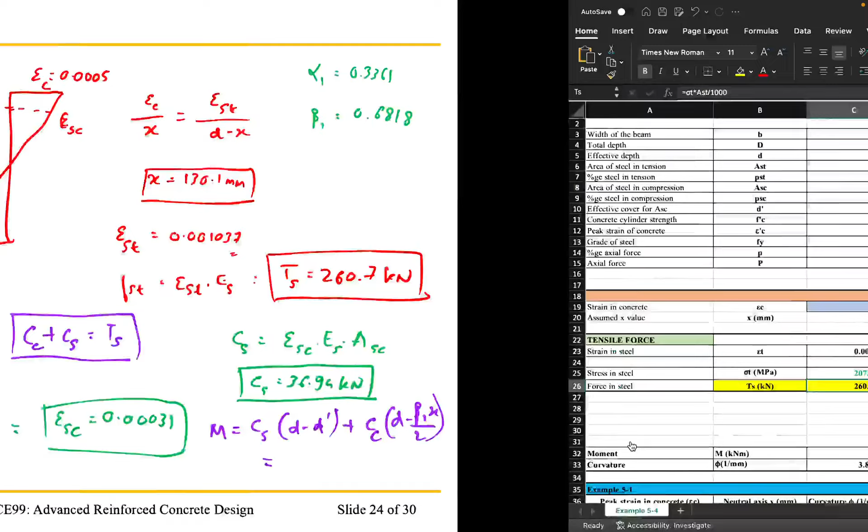We get a value of 92.46 kilonewton meter, and pardon me, we get the value of phi equal to epsilon c by x, that is 3.84 into 10 to the minus 6 per millimeter.

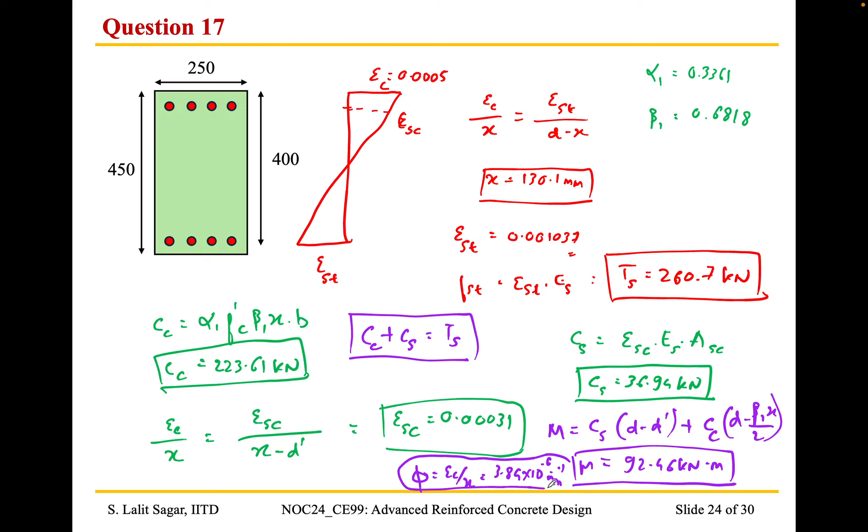Okay, so we have 92.46 and 3.84. Option A is the right answer.

So let us see what happens next. What would be the moment of resistance for the same cross section corresponding to a concrete strain of 0.0035? Kindly take 30 seconds, and then we'll look at the answer and the solution.

Option C. Okay, thank you for the response.

Yeah, so we look at the answer. Option C is absolutely right. So let us go and change the value of strain here to 0.0035, and when I plug the value of x as 83.86, let's see what happens.

We are able to balance the three forces. Tensile force and the compressive forces are 628, and the corresponding moment is 225.5 and the curvature 41.74. So option C is the right answer.

Now we are going to take up another problem where we are going to enhance the area of steel significantly, from 1.12% to 4%. Then we are going to enhance the compression steel to 2%, which is here. Then we are going to see what would be the influence on the moment curvature response.

Okay, yeah, kindly use this data, take 1 minute and let me know the answer. So as I was explaining, the dimensions of the beam remain the same, but we are changing the area of tension steel from 1.12% to 4%, and then increasing the area of compression steel from 0.53% to 2%. So what would be the corresponding moment of resistance and curvature corresponding to a concrete strain of 0.0035 in the extreme compression fiber?

Option D. Okay, thank you for the response. We can take another 15 seconds. Option D is absolutely right. So thanks for the response.

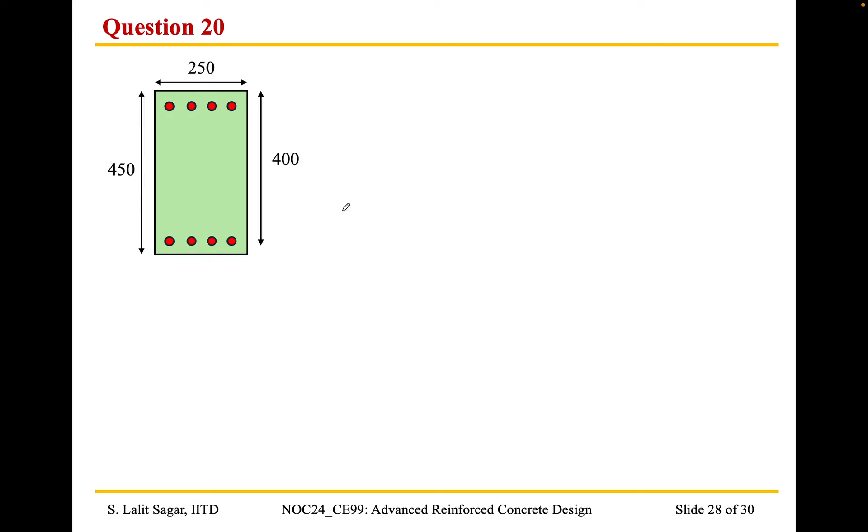So I think we can go to the Excel sheet and solve the problem. So what happens here is we are going to increase the AST to 4500, which is 4% of tension steel, and increase Asc to 2250, that increases to 2%.

Then what happens for epsilon c equal to 0.0035, when we plug the value of x as 205.7, we are able to balance the tensile force and the compressive force, and the corresponding moment is 740 kilonewton meter, and the curvature is 17.02 into 10 to the power minus 6 per millimeter, radians per millimeter.

Okay, so option D is absolutely right. What we are trying to do here is plot the moment curvature graph for the doubly reinforced beam given in question 20, and compare the moment curvature graph when the same beam is singly reinforced. When we retain the tension reinforcement but take away the 2% compression reinforcement, we will see how the moment curvature plot varies.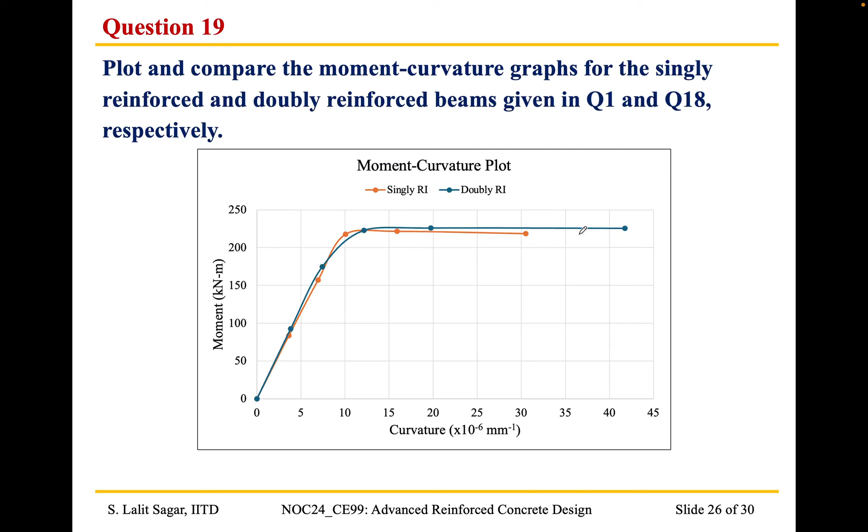This is interesting, isn't it? Because in the previous example we provided only 1.12% of tension steel, and the moment capacity was comparable while the curvature was increased.

As we were seeing, why I chose this 4% is because as per IS 456, that is the Indian Code of Practice for Reinforced Concrete Structures, the maximum steel that can be provided in the tension zone is 4%.

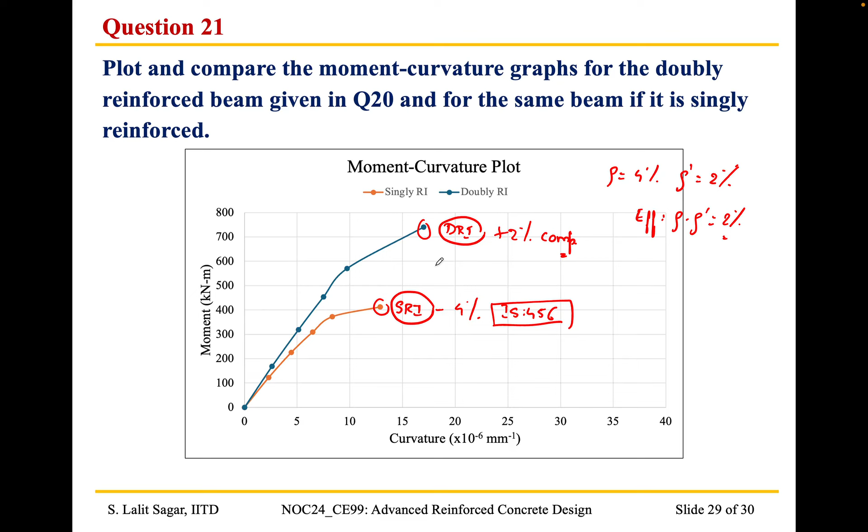So this goes to show the importance of providing compression reinforcement when we want to increase the moment capacity and the curvature capacity. So with that slide, we will come to a conclusion of today's live interaction session.